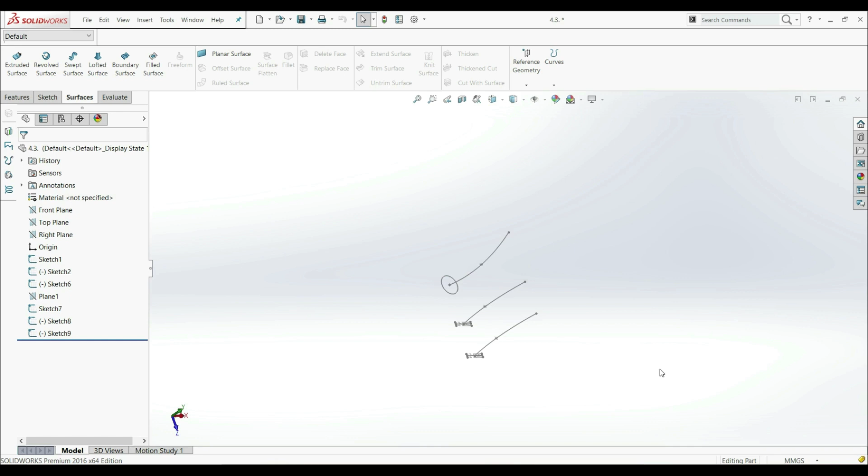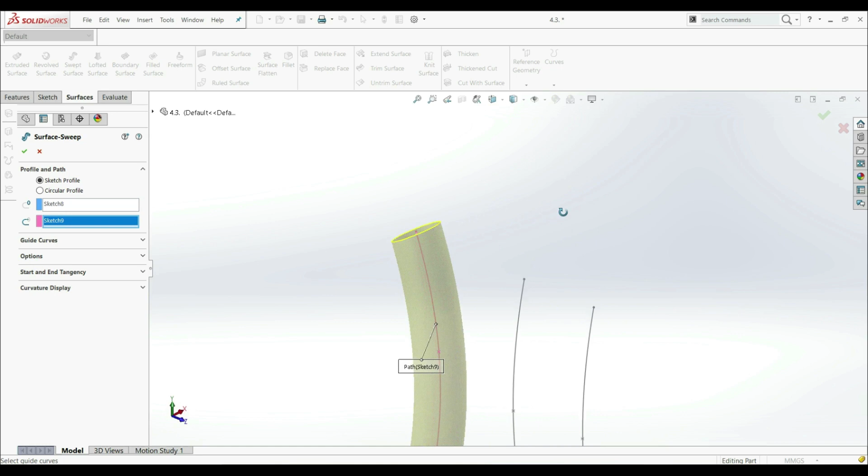In this lecture, we're going to show how to work with profile orientation and profile twist. First we work with this sketch. We have a circle, which we'll use as a profile, and this spline we'll use as a path. Let's go to the surface tab and swept surface. Let's choose sketch profile, choose our profile and our path. This is the normal surface we get.

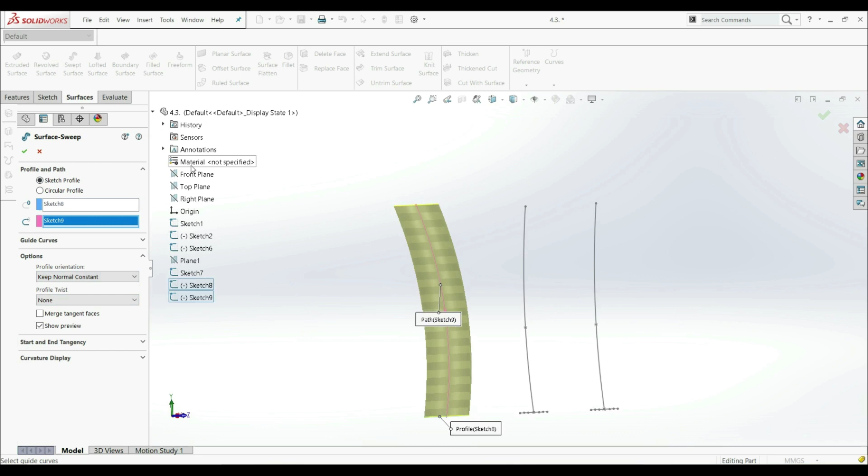Here we have options. Let's open this, and here we have profile orientation. By default we have follow path. Let's click here, and here we have another option, keep normal constant. Let's click this. Now let's open our tree, go to front and normal to. Now we can see that the first profile and the last profile cross section are parallel because we chose keep normal constant along this path.

Now if we choose follow path, we can see the difference. This last cross section is not parallel to the profile at the beginning, it's at some angle. So you can see how by changing the profile orientation you can have a different shape of your surface, and when you have some curved path, the shape of your surface by choosing different profile orientation can differ a lot.

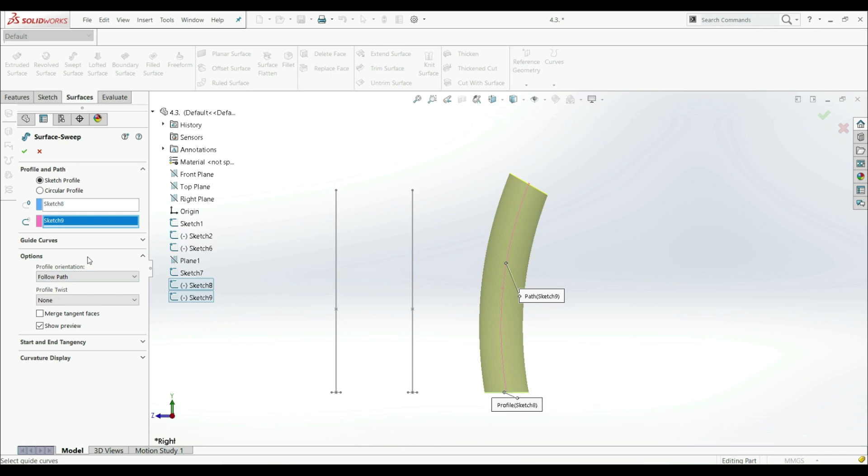Now let's click OK, and now we're going to show profile twist. We have here two sketches. For sketch 1 we have a profile, we're going to use this line and this path as well. And we have an identical sketch here with this profile and this path.

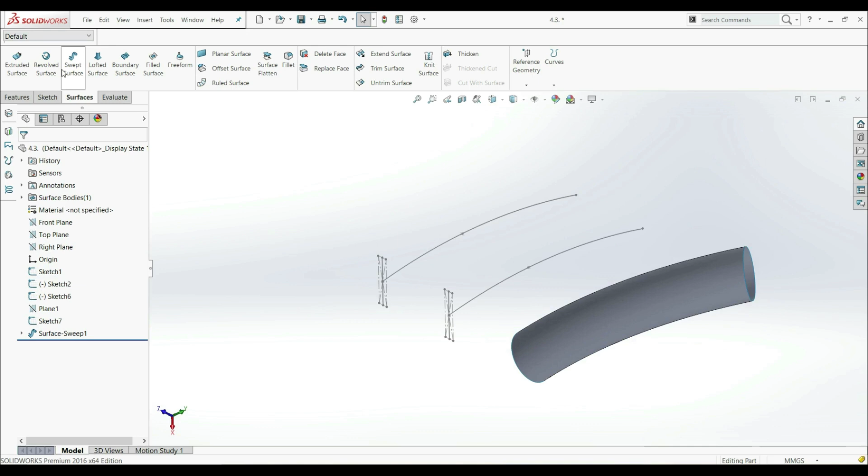Let's go to surface, swept surface, and choose this line as a profile, and this spline as a path. Now we got something like this. Let's go to options, and we have here profile orientation follow path. We see that this profile at the beginning and this profile at the end are not parallel. If we go with keep normal constant, now they are parallel.

But let's go with follow path, and here we have profile twist. By default it's set to none. We can open this and we have a few options: specify twist value, specify direction vector, and tangent to adjacent faces. We're going to use specify twist value. Let's click this, and now we have another option, twist control.

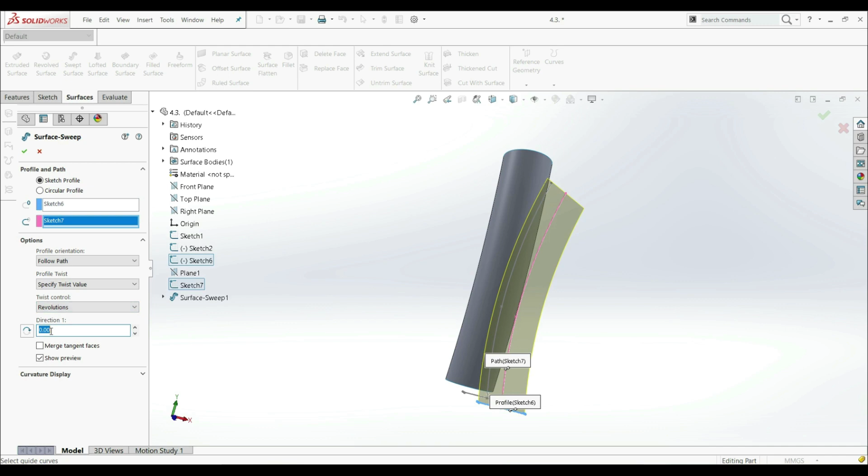Let's click here and we have a few options: degrees, radians, and revolutions. We're going to go with revolutions, and here we can choose the number of revolutions. Let's go with 2, for example, like this.

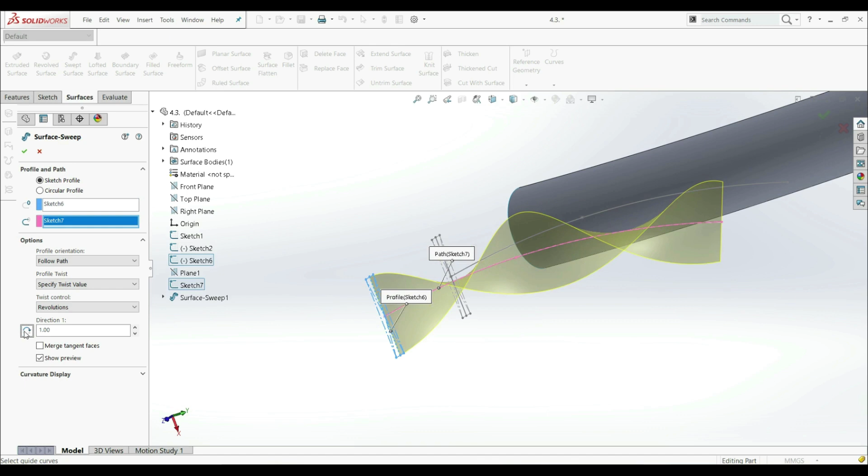Now what happens? We see that this profile at the beginning is rotating along this axis 2 times. If we go with 1 number of revolutions, now we see the profile rotates 1 time, 360 degrees, along this path. Here we can go with reverse twist direction, so we can change the twist direction like this. But let's keep it normal and click OK.

Let's go now to another sketch. Here let's go to swept surface. Let's choose this as a profile and this as a path. But now, other options, we're going to choose keep normal constant. So now we see that the first cross section and the last cross section are parallel.

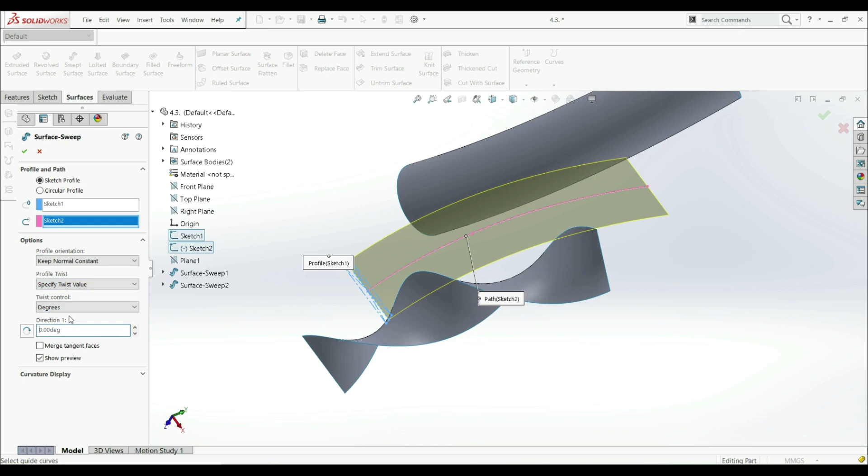Under profile twist we're going to choose specify twist value, and this is the only option we have when we have keep normal constant. For twist control, we're going to go with revolutions, and we're going to go with 1 number of revolutions like this. We can also go with reverse twist direction, or we can turn this off. Now let's click OK.

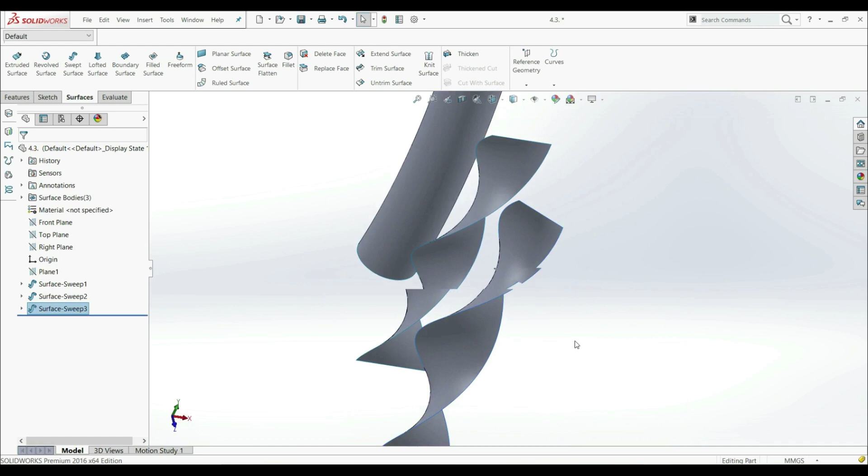Now let's go to front plane and go normal to. If we look at this, we can see that our last cross section on this surface and this surface are different. Here we can see that this cross section is parallel to the beginning, and this one is at some angle. So we can see this angle.

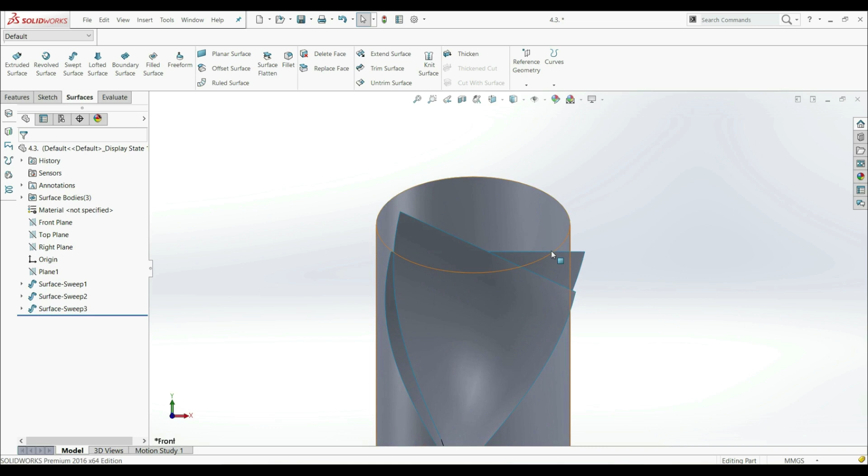We can go to evaluate, measure, and measure this angle. So we have 25.15 degrees difference when we use follow path versus keep normal constant.

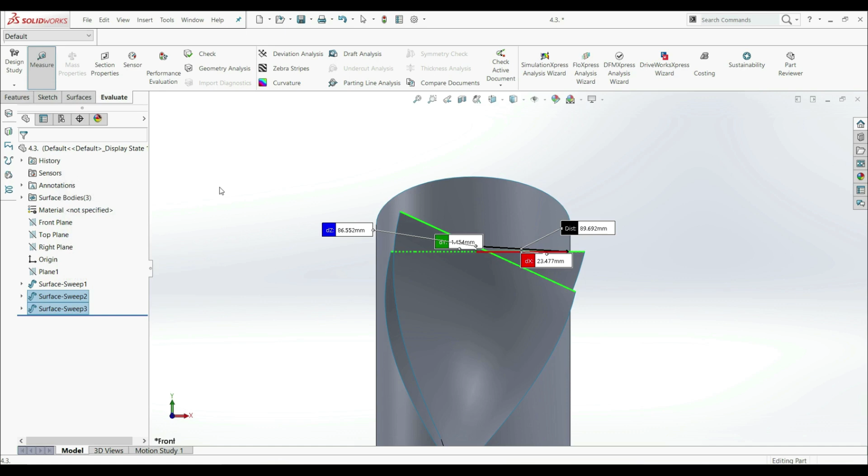Let's go back to our surface, this one. Let's go edit, like this. And now we see we have follow path. If we go with keep normal constant, not only is the last cross section parallel to the first cross section, all cross sections along this path are parallel.

So in this lecture we showed how we can change the shape of our surface by changing the profile orientation and how we can use profile twist.